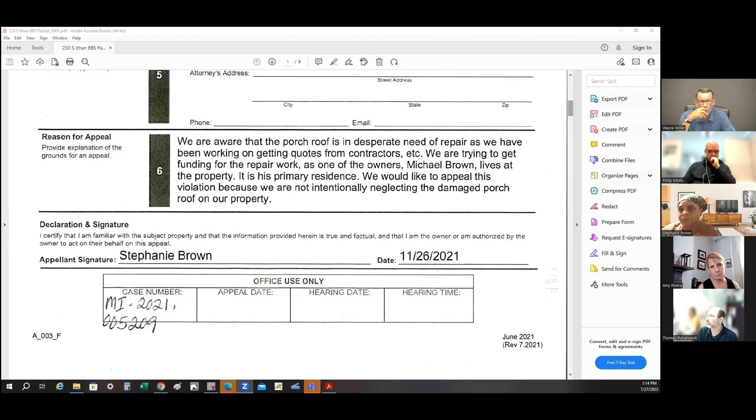But with that said, I'll share my screen. Okay. Can everybody see the screen? We can see the screen, but there's nothing on it. How about now? There we go. Yep.

Okay, so what we have is just the appeal with the notice, but I'll go right to the photographs. This is the common area between the two properties, and it just needs to be stabilized. You can see there's an accumulation of structural members that have suffered some wood rot between the two properties. So we would ask that the two responsible parties, both 228 and 230, come together and make the necessary repairs. As that happens, that's not jurisdiction for the board.

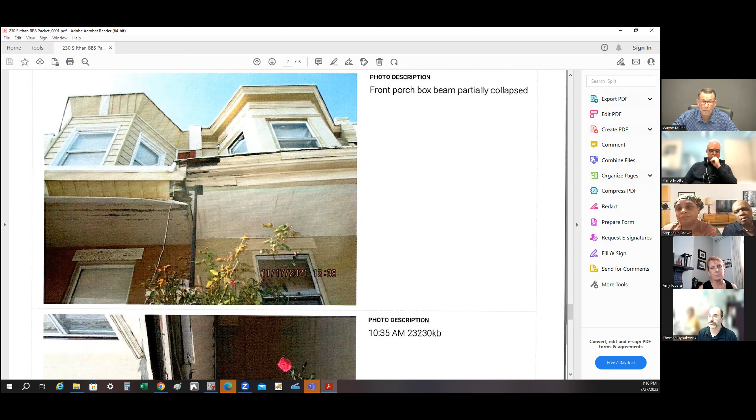The board's ruling is to basically listen to the case, whether or not it's warranted, and then make the ruling. So with that said, I'll stop sharing my screen and ask that we'd be okay with 60 days to obtain a permit. Okay, Stephanie and Michael, could you tell me your side of the story?

We did get a few quotes from contractors, in addition to reaching out to the Philadelphia Housing Development Corporation, and they were on board to do repairs on the house. However, once they sent someone out to do the roof, they did the roof, but then told us later that they didn't do porch roofs.

And this was back in, I believe, March of this year. So now we're back to square one of trying to get funding to get this porch roof fixed.

So Ms. Brown, have you spoken to the supervisor at PHDC? I haven't. The contractor who came out and started doing the roof contacted the supervisor because I told them specifically, we put in a form for porch roof. So he called to verify, and the supervisor said that they did not do porch roofs, even though that is what we applied for.

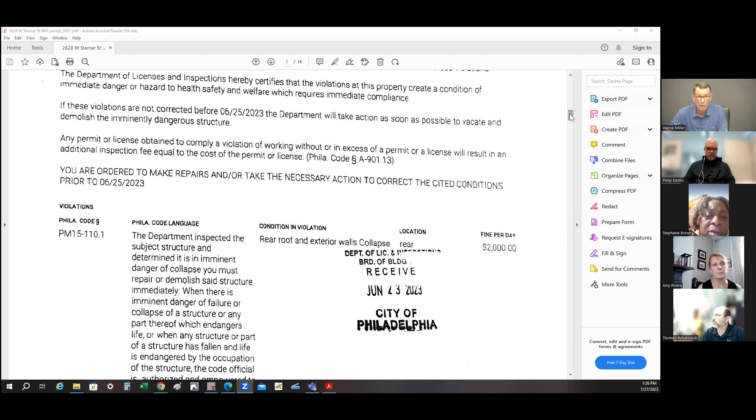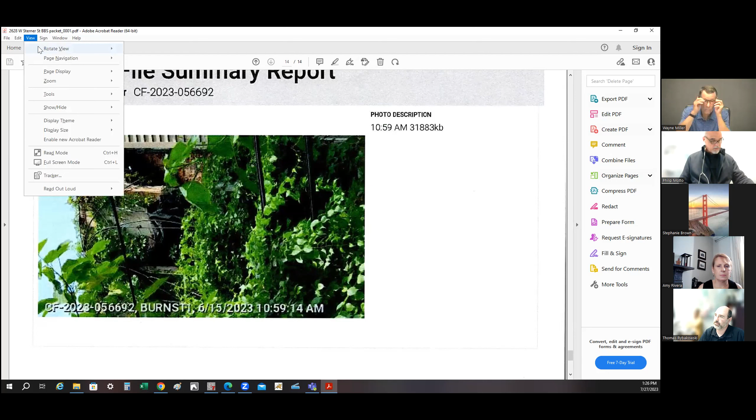This is a photograph of the property taken by the area inspector for the property at 2628 West Sterner. That's a photo of the posting, and this is a photo of the property. Let me also enlarge it.

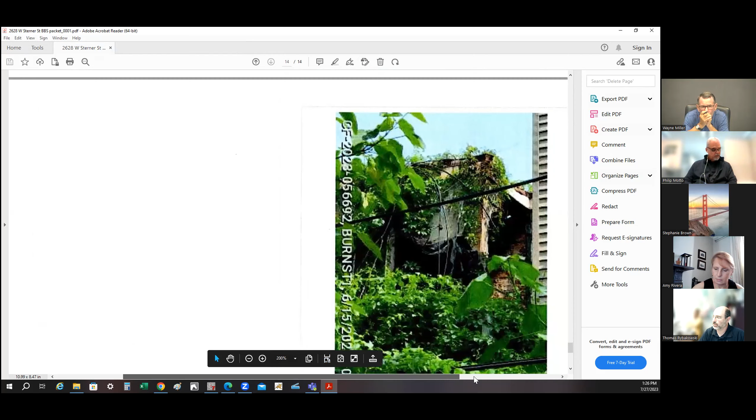This is a photograph of the rear of the property. You can see that the side wall and roof at the rear of the property is in a state of collapse. The property was deemed imminently dangerous. We would be looking for a permit to be under review within the next 30 days. With that, we'll rest.

Stephanie, you want to tell us your portion of the case? Yes. I want to start off by saying I've had a lot of contractors come out to take a look at things because I was unaware that it might have been to the extent that it was, but I didn't think that it was imminently dangerous.

That bathroom that you see is actually sitting on top of a concrete structure, the kitchen. There's a kitchen under it that's made of cinder block, and it's sitting right on top of it. I knew a tree had fallen and knocked the wall off. That's what you're seeing, but you couldn't see anything else because of all the foliage that was there, so you couldn't even see that it was sitting on top of a cinder block kitchen. Nothing had fallen other than that one wall.

As far as the roof, I was definitely not understanding about it because 5 or 6 years ago I had a roof put on there. But once I got the information from you guys about the citation, which I only got about 3 days before the work was supposed to be done, I had the contractor who did the roof come out, and he informed me that it looks like my neighbor next door, when he did his house, tore up everything and threw it on top of mine. I don't know how long ago that was done, but it started causing damage to the roof. I didn't know that, because last I knew the roof had been done.

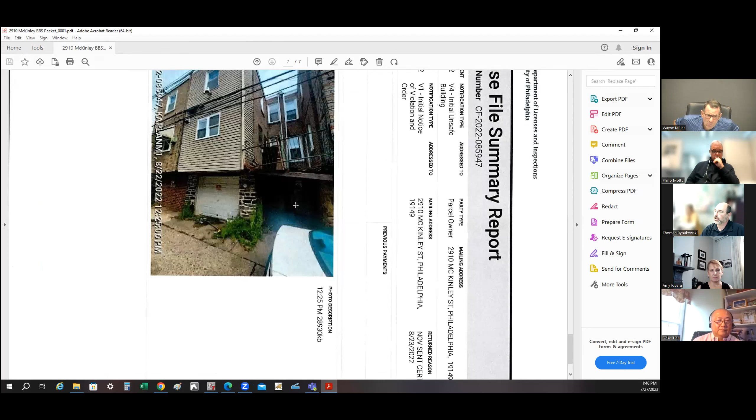So you can see between the two properties, the attached common deck between the two rear breezeways is dislodging, and the handrail is dislodged between the two properties.

What we are asking is that the owner of this property obtain a permit within the next 60 days for the repair. It will involve getting the other owner for that, but that's not jurisdiction for the board. The other owner did not file an appeal. So we are ascertaining to the board that they obtain a permit for the repair of the rear deck in its entirety for what they own within the next 60 days.

Okay, so, all right, Dave, can you want to tell your side of the story?

Yes, okay. Thank you for this hearing, and also thank you for the approval for this later appeal. I'm the owner of this property, but that's a rental property, so I don't live in this property. And the situation is that I initiated this case last summer, August, which multiple times we reached out to our neighbor to try to solve the situation, but never got any positive response from the neighbor. Actually, they never opened the door.

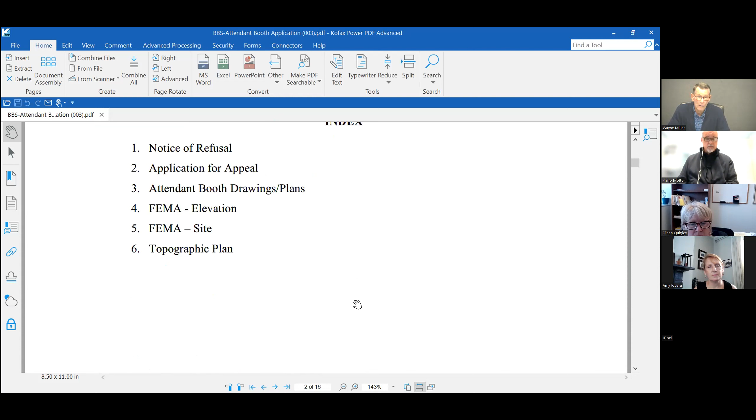Can everyone see that? Yes, we can. Okay, perfect. So good afternoon, members of the board. Thank you for your time today. We're here today to seek a variance from the regulation related to elevation of a proposed accessory attendant booth.

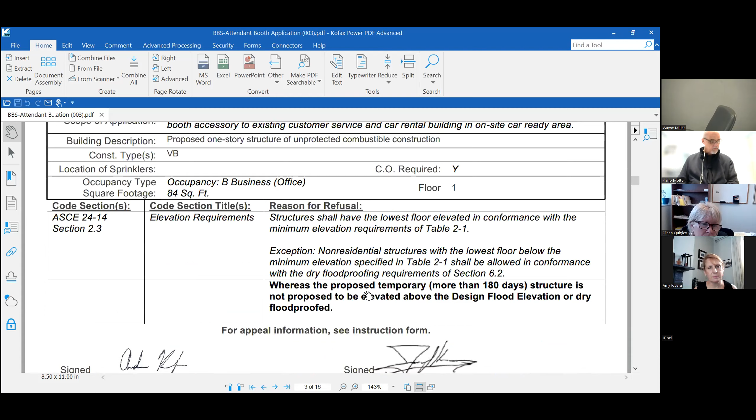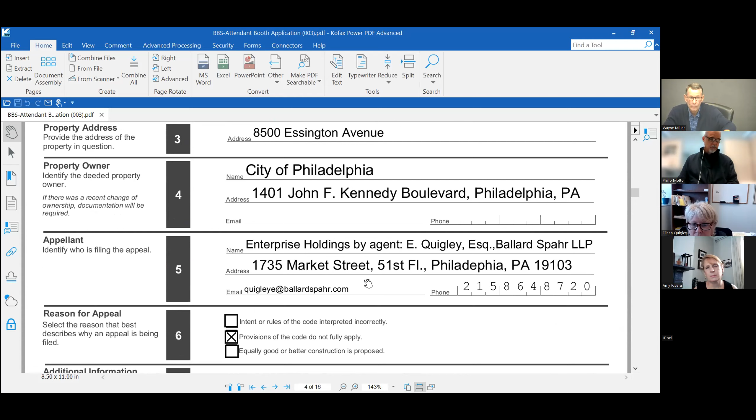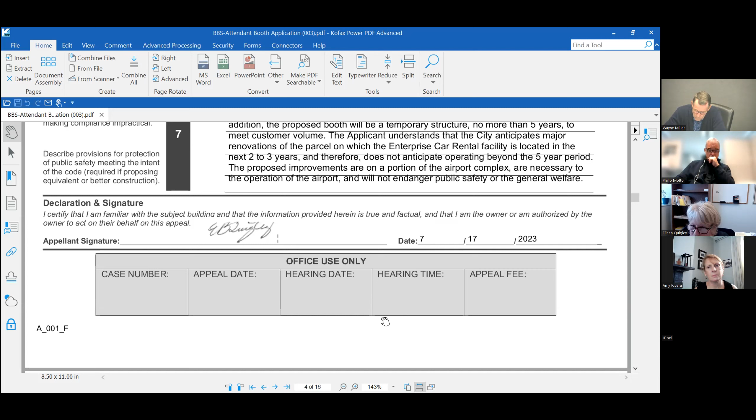It's accessory to an on-site customer service building for the car rental facility for Enterprise. The grounds for the appeal is essentially that the regulation doesn't really apply to our situation because we're technically seeking a temporary variance for not more than 5 years, because we understand that the city is contemplating rehabilitation and major improvements on this site.

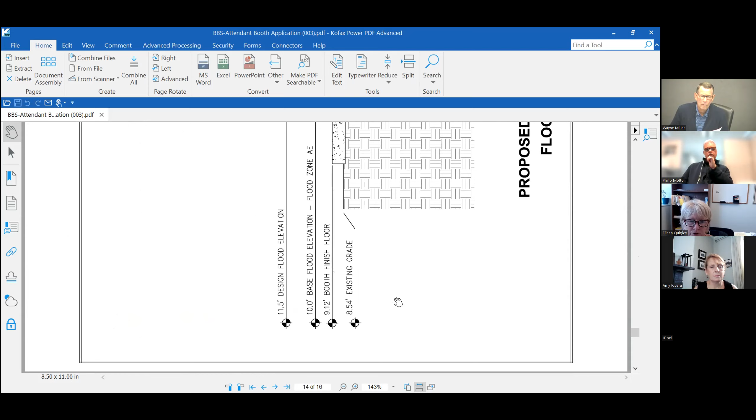So I'm going to go down to a topographic plan so you can see basically where the site is in relation to the Delaware River, to get you sort of oriented. So this is a visual where the booth will be, about 6,800 feet from the river. I'm going to try to reduce that a little bit. Yeah, and rotate right also.

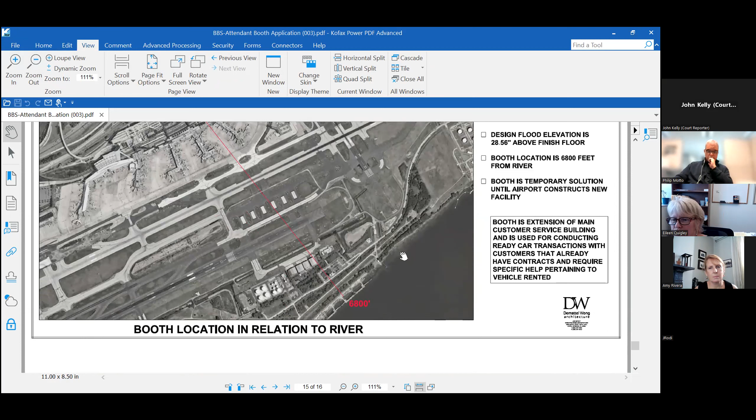Excuse me, this is the court reporter. Could I ask who just spoke? Oh, I'm sorry, this is Eileen Quigley. Oh, that was Joe Rodi, thank you, from DW Architects. He's the architect.

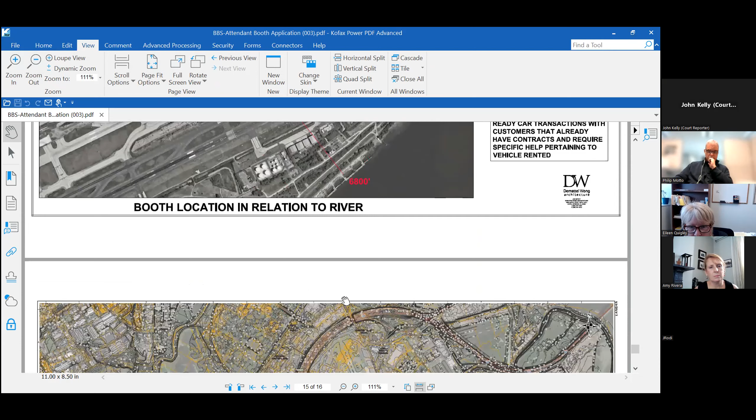So here's a visual. That gives you some idea. And this is the topographic plan. So this is the Delaware River here. This is the facility site here. So this is Joe Rodi. Essentially, this is a parcel within the overall rental car area complex serving the Philadelphia airport. It exists amongst all other rental car companies that are there.

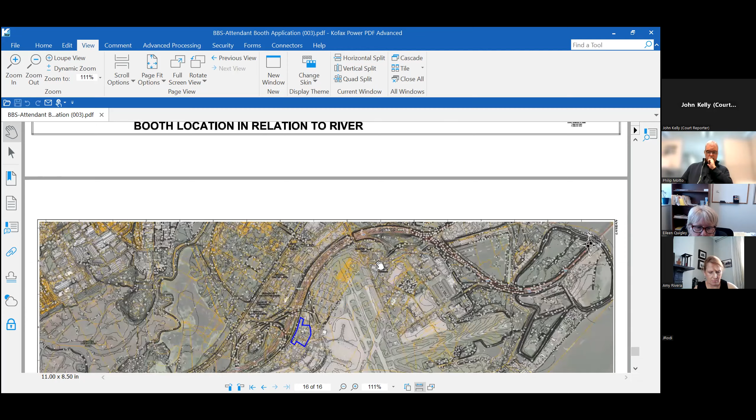And the proposal is to install this 84 square foot pre-manufactured booth for the purposes of housing two enterprise employees acting as customer service representatives. The function is being requested to try and improve the overall customer experience at the enterprise facility, where the operation brings customers to the front of the building, about 50 feet away from where the proposed small prefab booth is going to be placed.

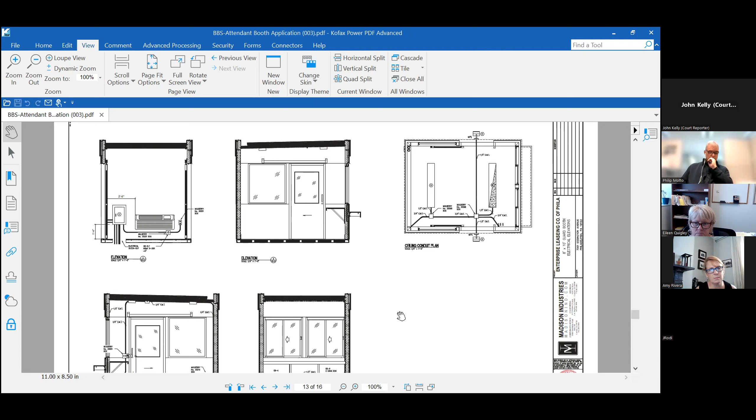Customers get dropped off and go inside to rent the vehicle within the main building. When they exit, they come out to their ready car. If there's an issue, which happens sometimes, or they want to change the car, the intent is for two employees to be housed in this booth who can immediately take care of whatever issues they have, rather than sending somebody back into the building to get in line and wait to speak to someone at the rental counter. So it's an accessory use to the customer service building.

We're requesting a variance for this in lieu of trying to flood proof this small prefab structure. Our current grade on the site is at 8.5, and the design flood elevation is at 11.5. The booth is proposed to be installed on a raised slab, and it will be installed to provide hydrostatic resistance per code. The proposal is to raise any electrical and mechanical above the design flood elevation in lieu of providing a dry flood proofing system to surround the booth.

Thanks, Joe. Anything else to add regarding the construction of that booth, the materials? It's an all metal construction booth, type 2B, non-combustible materials. It's currently not designed to be waterproofed, but we are taking the mechanical and electrical portion and raising it above to prevent any issues should there be some unlikely flood event on the property.

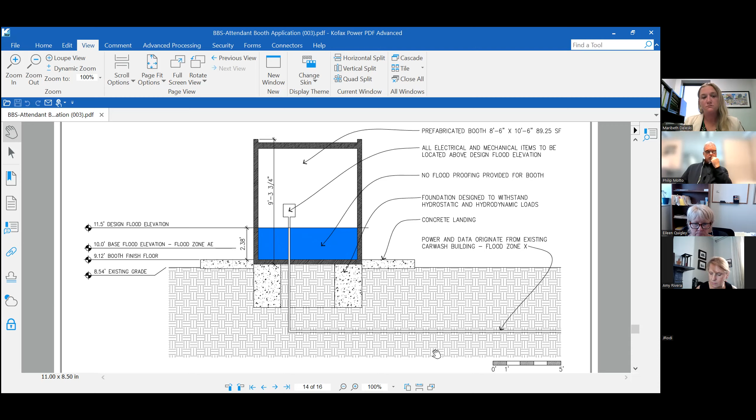Does anyone have a problem with this? No, I assume that in the event of a flood, this building would be vacated along with the surrounding area. That's correct. There's probably 400 vehicles that'll be parked in and around this site, and the risk would be much more towards the vehicles being damaged by flood than anything related to this booth. The booth is completely made out of metal. There are no other finishes in the booth that would be damaged in the event of a flood, so you're literally going to open the door, let it dry out, and start operating again. The only issue I would have, and you fixed it, is that you moved the electrical above the floodplain. Correct. I don't have a problem with it.

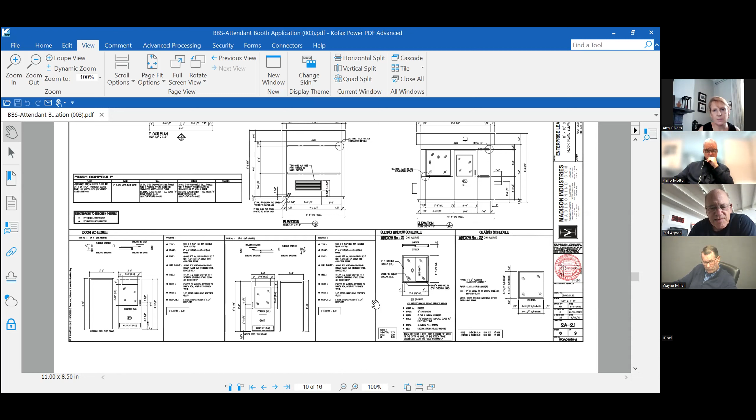We have one question. Which way does the door open in that little building? Does it swing inward or outward? Now it swings out. Could you make it open inward? Actually, they're sliding doors. Yeah, the plan shows sliding doors.

We just had a concern about the idea of a car sinking in water and not being able to open the door in a flood situation. We were concerned about somebody trying to open a door to get out. In this case, you can manually do it. If the screen is still up for everybody, the image in the upper left corner shows the floor plan of the booth, and you can see there are two doors, one on each side, left and right, and they're both sliding doors.

The whole thing's protected by bollards, Joe. Would bollards help? They've been provided. Okay. All right, I would think you could open a sliding door. All right, okay, just asking a question.

They said that it was temporary on the proviso. Are you going to give a time limitation? The request is for 5 years. No more than 5 years. Yeah, okay.

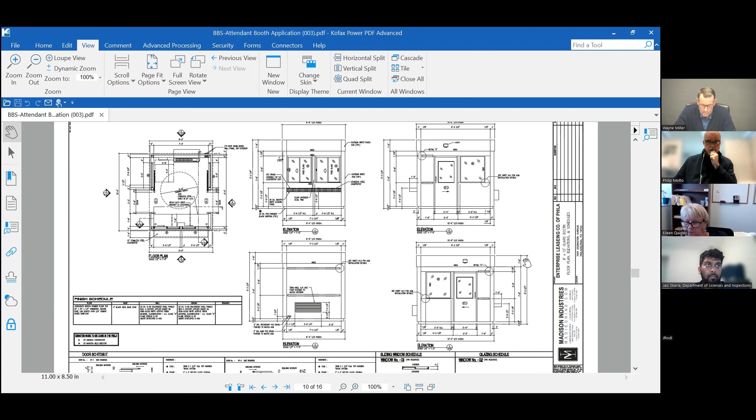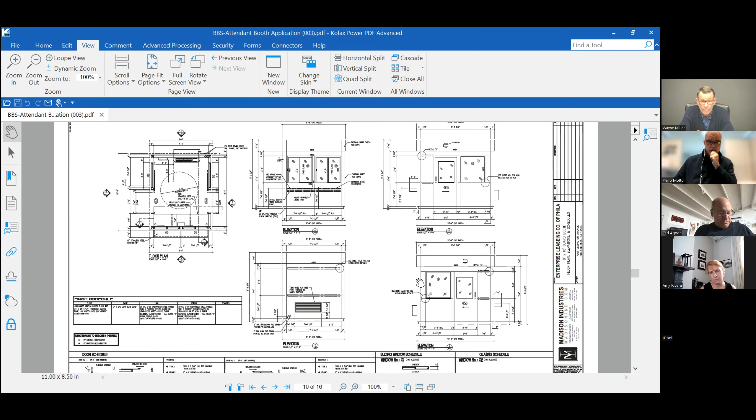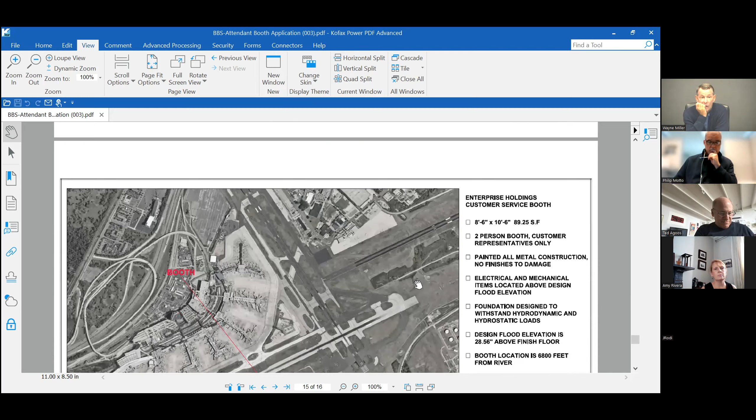They're looking at where the enterprise car facility will be located in the next 2 to 3 years or so. What they're going to do is the airport is planning to build a consolidated rental car facility on the footprint area of all the rental car companies where they sit today. That entire campus between Enterprise, Hertz, Avis, Budget, all those car rental companies are going to be relocated to one large parking garage facility on that footprint. They're in the pre-planning stages of that new facility right now, and it's unknown at this time when activities will start. But the first step is to build interim facilities for all the car rental companies to move into while they demolish the whole campus area to make way for the new facility. So that may start in 2 or 3 years, but that's why we're seeking 5, because it's unknown until we get back with the airport. Okay, all right, no more than 5.

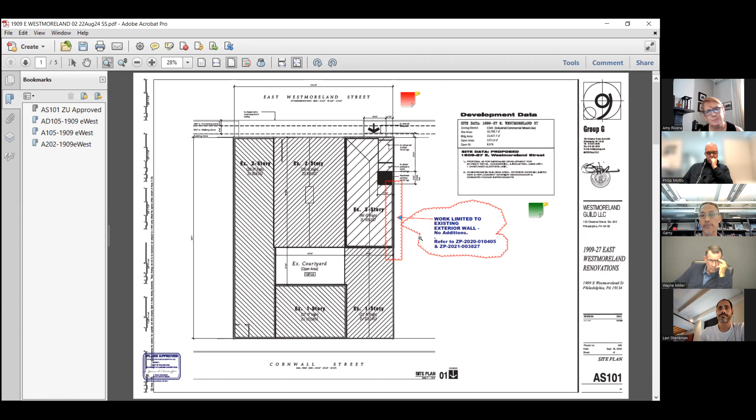Okay, so what we have is the property that Levi mentioned earlier, highlighted in red bubble is the area of the existing, in this case, masonry party wall. To the right of that property line is the adjacent lot that's being used as a parking lot. The area within the bubbled cloud is the location of the existing window openings that we are proposing to reopen so that we can allow natural light into several of the artisan studios on the upper floors. This is actually a composite site plan that shows the existing vacant lot relative to the adjacent structure.

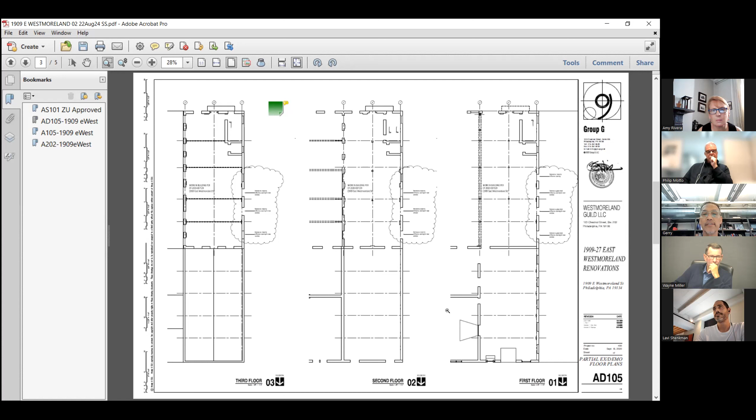Again, on the first floor, second floor, and third floor, several window openings were infilled. As you see here, we have 6 larger window openings that were infilled, then 3 smaller openings infilled with glass block, and an existing small window opening infilled with glass block, which we extended down to the ground so we can have an entrance directly off of the parking lot.

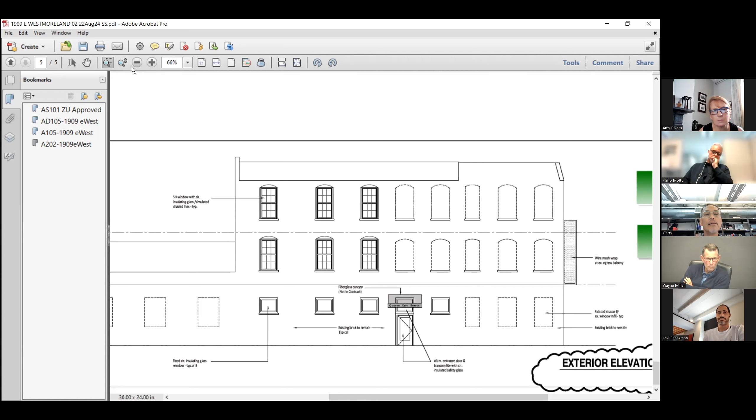And what's the ownership of the parking lot? The parking lot and the buildings in the original application are owned by the same entity. Okay, but are they separately deeded? That's correct. They're not consolidated. That's correct, yeah.

I don't know if there's a lawyer in the room, but typically would this require a formal easement, or is this a unity of use kind of situation? Our concern is that if anything were ever developed adjacent, the openings might have to be closed up. But I know our legal counsel is not here today.

Even if there was a unity of use, you'd still have to get a refusal from the board. A unity of use is only recognized in zoning, not building. So I think in the past they've used easements, and in the proviso you'd state the windows would need to be infilled if there were any construction over the parking lot. So we would call for an easement to be recorded, is what you're saying? I think that's what you did in the past, yes. Yeah, okay, that sounds right.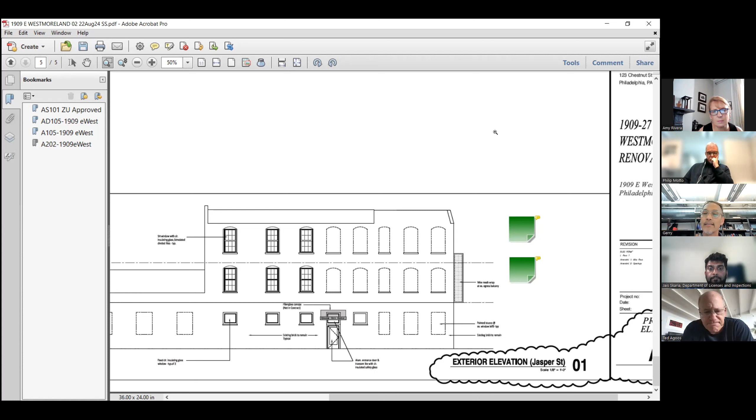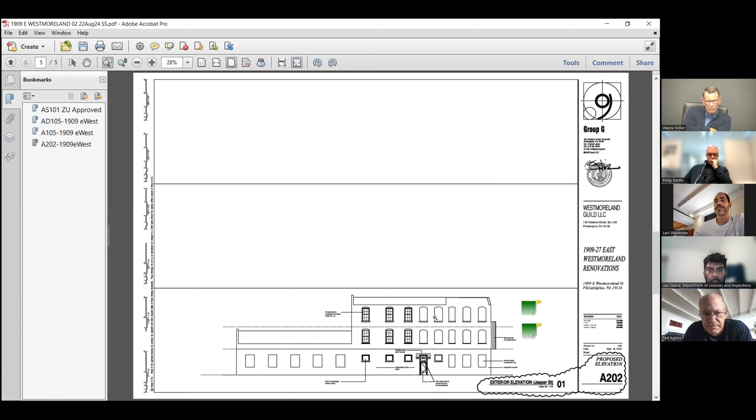The sprinkler system—you said there's 5 buildings there? Yes, that's correct. Okay, and where does the feed come in, what building? Well, if you go to, Gerry, share that first shot or the composite that shows both properties—the feed comes in through the existing 2-story along Westmoreland. The FDC connection is in sort of the top middle section there. It comes in off of Westmoreland Street to the left, right there where Gerry just drew a line.

Okay, and is that building accessible to all the buildings, in case there's a fire, do they have to shut the system off, or if they sell the building, do they have to disassociate that building from the sprinkler system? So all the buildings are, I don't want to use the word consolidated, but they share a common area. The buildings are, you can pass through all the buildings. So they share a sprinkler system and common area, fire alarm panel, monitoring, everything. And everything in the buildings has been completely redone, everything is new. Wayne, they do show up as one entity on Atlas.

Okay, all right, fine, yeah. Are you able to provide a sprinkler head at each of those new openings that you're proposing? Yes.

Okay, great. Well, before we go there, Ted, you introduced the idea of a deeded easement moving us towards the unity of use, which is, as Jace mentioned, only applicable under zoning. That actually introduces our rationale for appealing the refusal. We're basically saying we'd like the board to consider our appeal in the spirit of what unity of use is promoting, which is that there's a benefit for both properties to be integrated in their use and in the way they relate to each other, providing access and natural light so it can be a successful development. That addresses the benefit under unity of use, which I understand is only applicable under zoning.

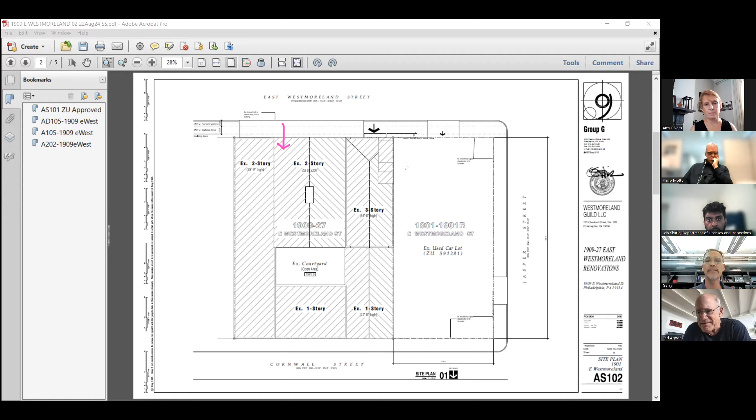Yeah, but you also have to look at exterior wall openings—you have 0 feet fire separation distance, so you're not to have any openings at all there. I'd actually like to address that question, Jace, what you mentioned. Under the same exception—in fact, I'm going to share another sketch—under the same exception, it allows this condition where a property line can run through a building and not require a party wall or a firewall where the property line is. It seems to me that this creates a more hazardous situation, more so than what has been submitted under the application.

Correct me if I'm wrong, Jace. I'm saying that the exception language allows for a property line to come through an existing building, where the building basically overlaps the property line. I'm not talking about our specific application, just that the exception allows this condition. Can you reference it in the code?

Sure, it's 706.1.1, exception 2. I'll read it. But Gerry, are you referring to a situation where there's a property line inside of a building, but where it's the same ownership on both sides?

You said Monday? Yeah, it was through Newforma. Any luck? Can we try to share? There we go, it's coming up. Okay great, okay great. There you go. Thank you very much, thanks for your patience.

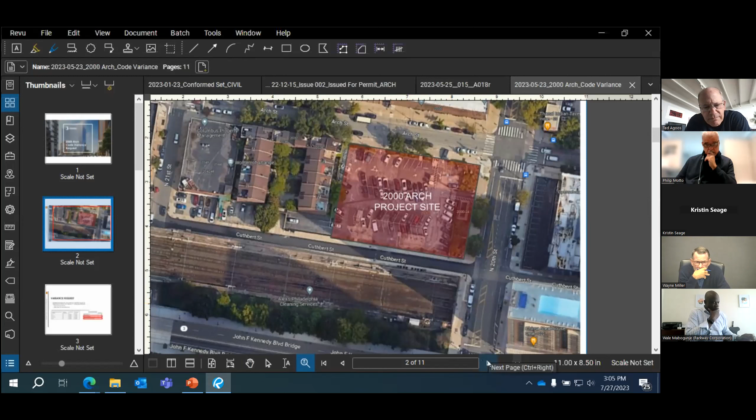Okay, great. All right, so as you said, we're looking for a variance for the 2000 Arch project. The project is located at the corners of Arch, 20th, and Cuthbert Street, adjacent to the SEPTA tracks right-of-way. We are requesting an exemption from the IBC 2018 Table 602 for the fire resistance rating requirements for exterior walls based on fire separation distance.

So to give you some context of what we currently have in terms of our siting, we have a frontage on the south facade onto Cuthbert Street. We are measuring 15 feet to the center line of Cuthbert Street as defined by the fire separation distance definitions. And on our west facade, which faces a new alley, above our 9th floor, we have an 18-foot fire separation distance.

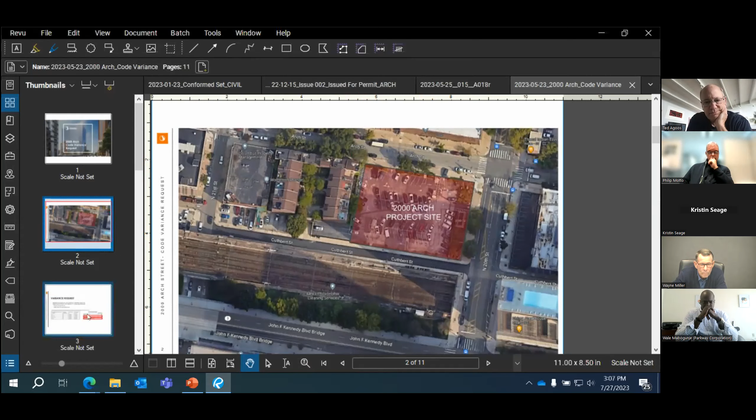So I'll go back here to the site plan and give you a little bit of a view. Cuthbert Street is a 30-foot wide right-of-way. We're measuring right now, if we do it just purely by the way the code states, it would be 15 feet. And to the west, which faces some low profile residential buildings, at our 9th floor and above, we have 18 feet to the property line. So we are looking to eliminate the requirement to have 1 hour rated exterior walls.

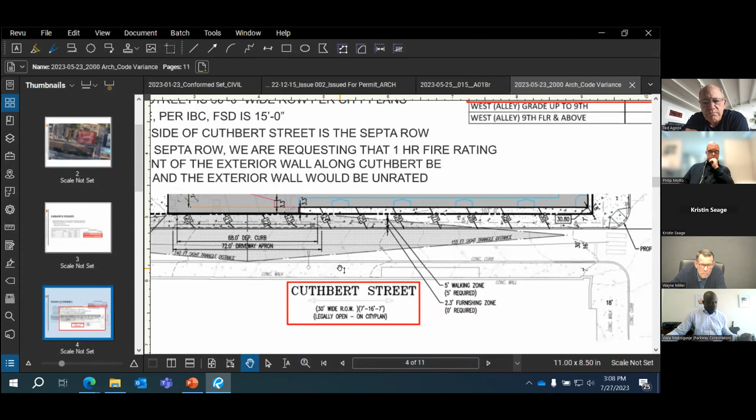As required by code right now, we do have a 1 hour rated shadow box at our floor lines to comply, but we're looking for relief from that. Going deeper on Cuthbert Street, because the street itself is 30 feet wide and it fronts onto those SEPTA train tracks, our proposal would be that we're able to measure our fire separation distance that full 30 feet, and we're a couple inches off the property line. So we would be over 30 feet, which the code states that anything over 30 feet can be unrated.

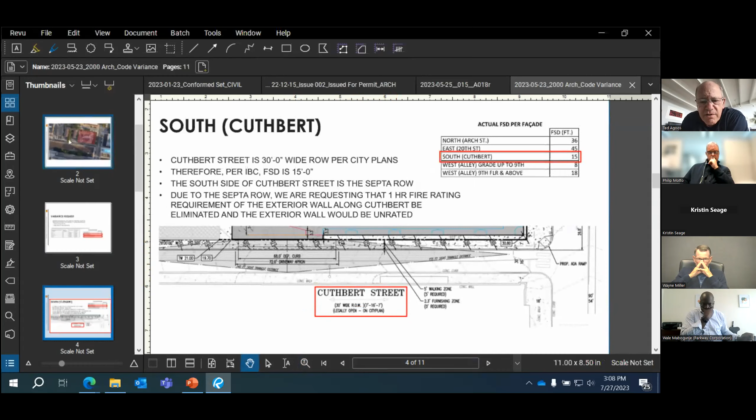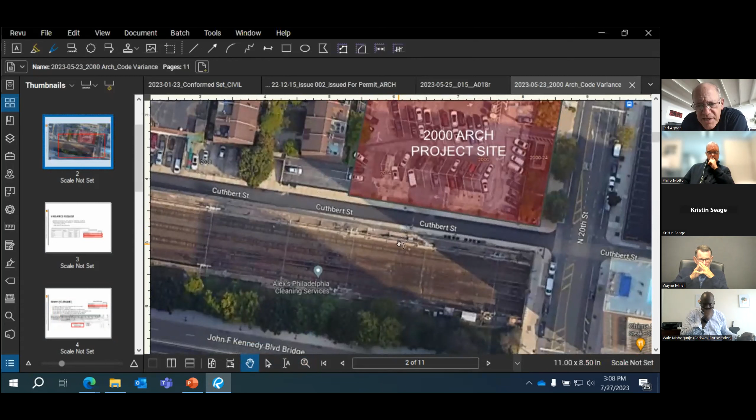That's the one request related to the south facade, Cuthbert Street. How far back are the tracks from that property line on the south side of Cuthbert? I don't know that off the top of my head, but we can chase that number down. Is the property line the sidewalk line there? That's the 30 feet from there, that's the right of way.

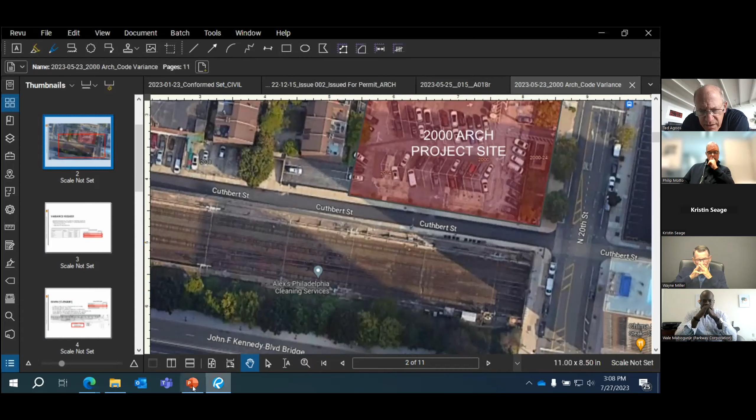Yes, there's a retaining wall and this drops down, there's a change in elevation. I have this pulled out too, just to give you some 3D view here. There's a large retaining wall that's set back from the sidewalk, and that's where the tracks begin.

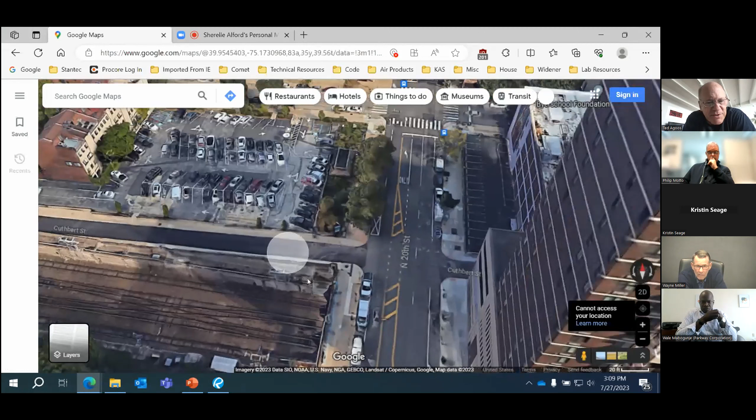Any guess as to how far back? Looks like there's one track right against that wall. Let me see if it says anything in our civil drawings. I think our drawings kind of end there because we're not on the tracks itself. I apologize, we don't have that handy, but we can follow up with it.

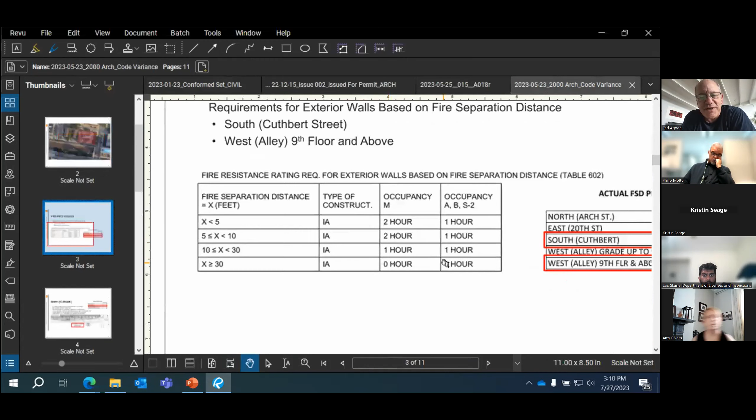I don't know if you know, or Jas, you may, what would the distance be required if the exterior wall were not required to be rated? It'll be over 30 feet. Right, so that would be the equivalent of being 60 feet away, I guess. But the way that the fire separation distance is called out is to be measured to the middle of the street.

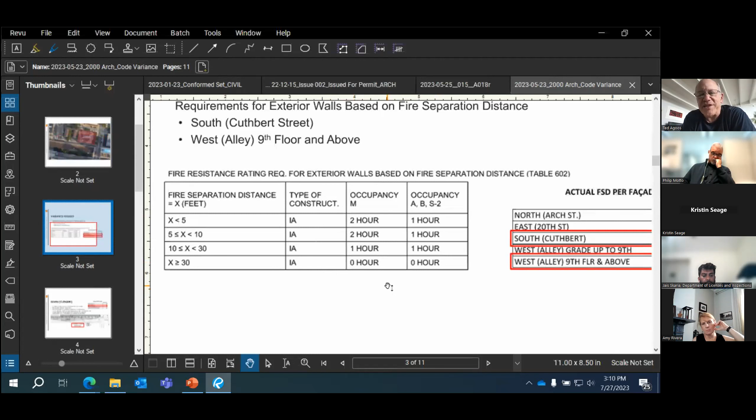I'm just wondering how wide a street you'd need in order to be compliant without that 60 foot. Well, we are compliant on the Arch Street side, that street is much wider. Just to the center of that street, we're at 36 feet, over 30. And east on 20th, it's even wider than that. So those two facades are unrated.

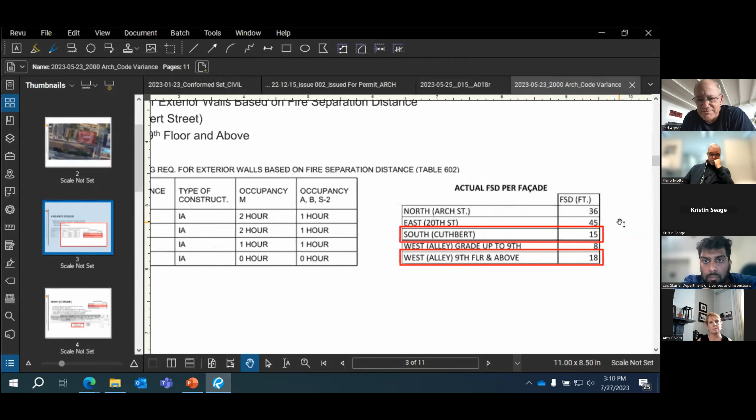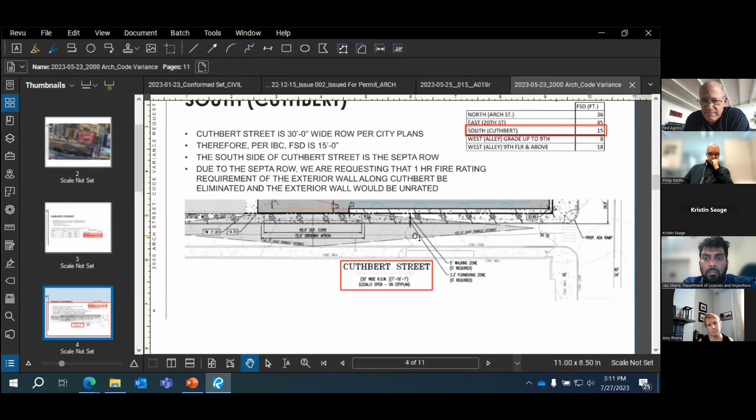I think there's access here, I'm not sure if someone from the fire reviewer might be on the line. There is access along Cuthbert, someone could still come down the street and access that facade. So we were really thinking that because that track area is open, we could hopefully measure that to the full 30 feet of that Cuthbert Street right of way.

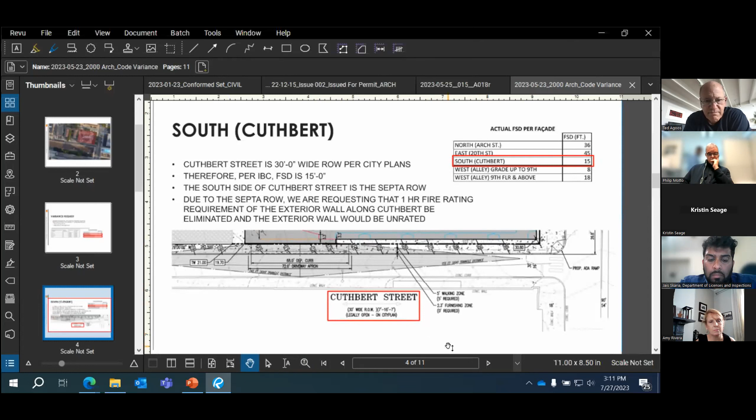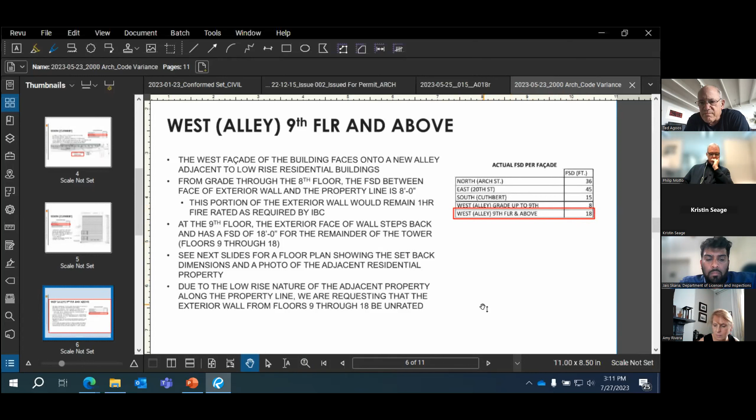Food for thought. So then the other request here would be a similar request on the west facade. On our west facade, we have the building step back above at our 9th floor and above. Below that, we are not requesting any change there, so we would be rating those exterior walls and complying with all the percent opening requirements. But where we step back even further at the 9th floor and above, we're looking for the same type of exception or exemption there. For context, this is our floor plan, the west facade here on Plan West.

Let me zoom in just slightly. To our property line, we have 8 feet at that lower portion of the building. And so our request is really for the upper portion of the building, which is 18 feet to the property line.

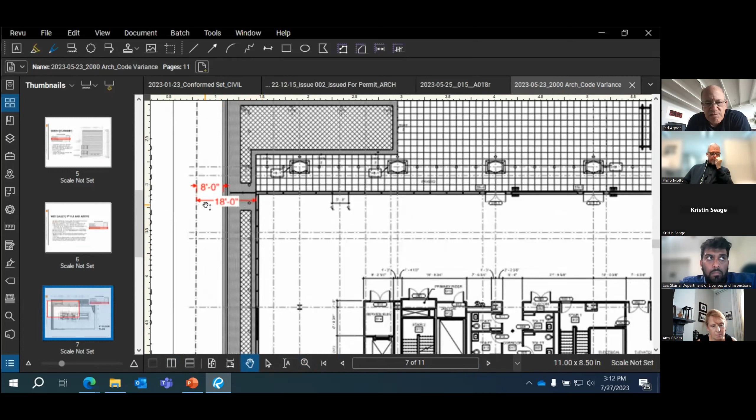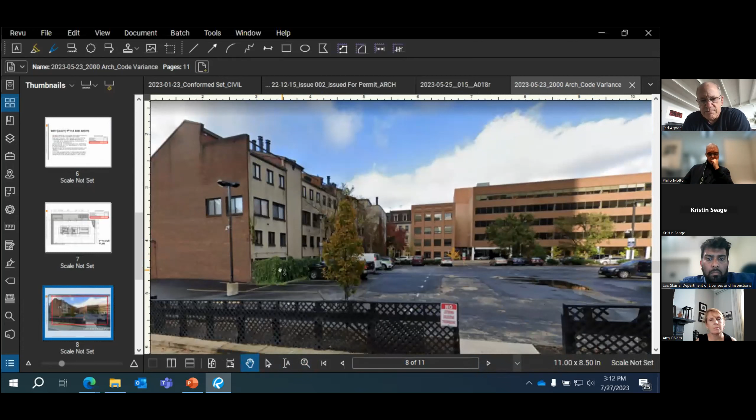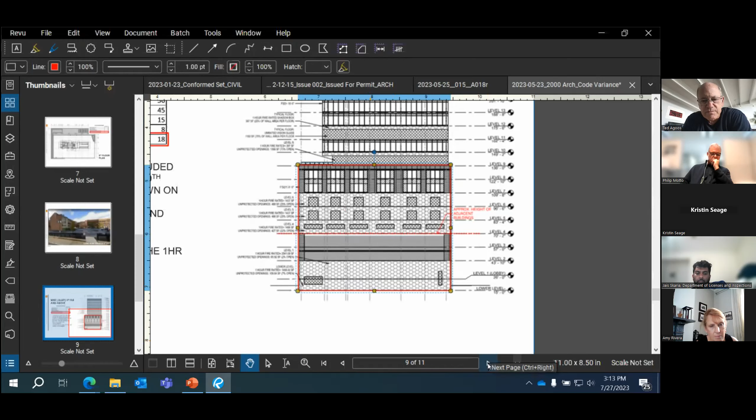The adjacent property is a low-rise residential property with a courtyard in the back. Our building, or those buildings, come up only to about the 4th floor of our building, so all of this area would still be 1 hour rated. I'm just highlighting this area. You can see that red line showing the approximate height of where those adjacent residential buildings come up to. Our request would just be to reduce that rating requirement once we get up to the 9th floor, and up to the 18th floor would be where we are asking for that exemption.

And I know Lieutenant Dimes can weigh in on this. We've at times looked to be maintaining that rating at least, say, 15 feet above the top of an adjacent building. So you're clearly well above that. Correct, yes, we are well above that.

You said 15 feet, Ted? Yeah, I know at times in the past, like 2 floors above, or a floor, and in terms of windows above, in terms of risk from, let's say there were a fire in the townhouses, affecting the new construction. And what is the distance?

We are well over 70 feet above to where we would be requesting the exemption. Yes, I think, just my opinion, 15 feet's too small, 70 feet would probably work. I think that if there was a fire in that townhouse and it was a good one and it was ripping pretty good, it could jump to the other building with 15 feet above, depending on wind direction and stuff like that. But that's not what they're asking here. It's a 70-foot threshold, which I would think would be.

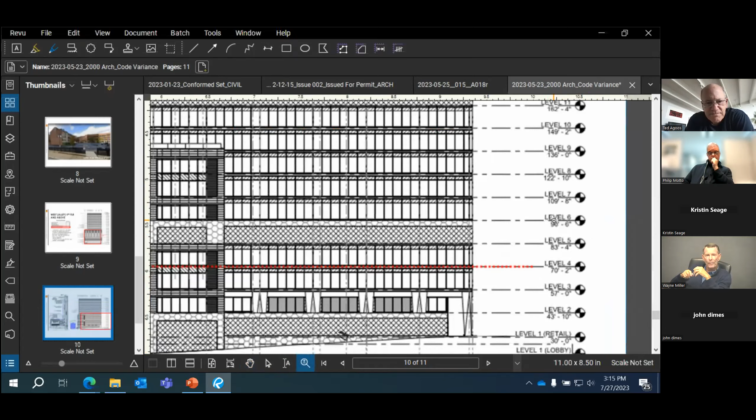Let me just double check my math here. So we got 136 to 66 feet, I apologize, I misspoke. Yeah, there's really, again, there's no data on that. Obviously the greater the distance, the better. But anything 50 feet or greater would probably be, in my opinion, a lot safer than the pre-designated 15 feet. So I wouldn't have a problem with that on that side.

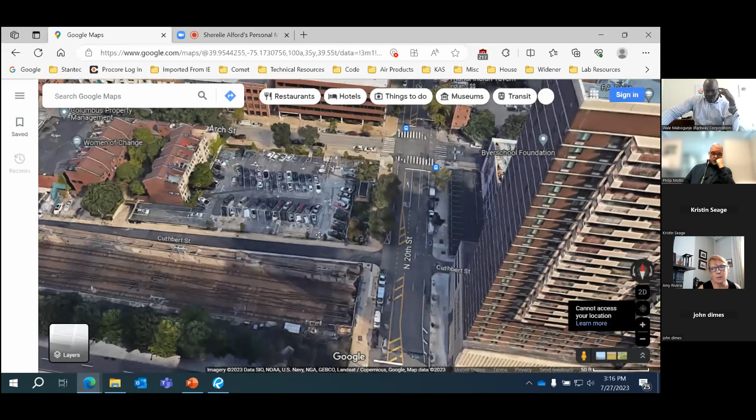It would be, we have to get that number for you, but it's over 30 feet. Right, plus the code tracks are required to also be over the 30 feet. Tracks are also lower in this area as well. This is just where the tunnel exits from suburban, yes, so they're several feet below as well.

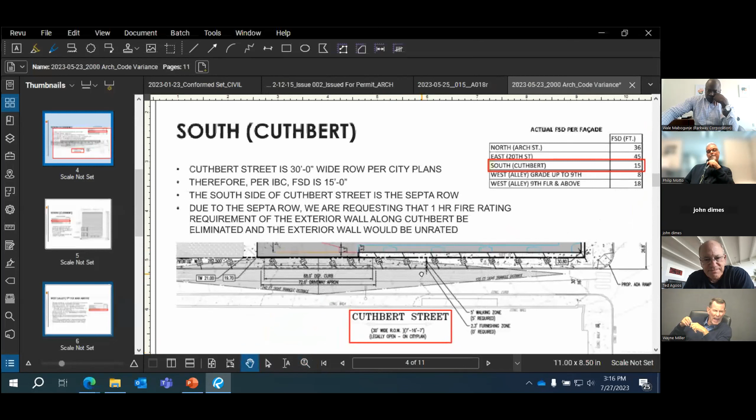Is the reason for the variance request cost saving? Partially. Okay, and what's the rating, is it 1 hour? That's what you would be under the code. Correct. And what is it now? If you got the variance, what would it be? If we got the variance, it would be 0, unrated.

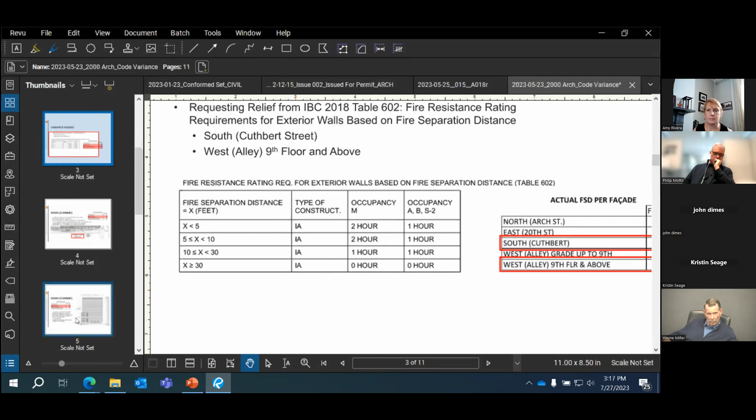Oh okay, so the code says anything over 30 feet of the fire separation distance is 0. So that's what we're looking for, is to basically be able to calculate that as over 30 feet because of the SEPTA right of way tracks being open and having that Cuthbert Street be 30 feet wide. And is most of that facade glass? Yes, there's small portions that have terracotta, but predominantly it's a glass facade.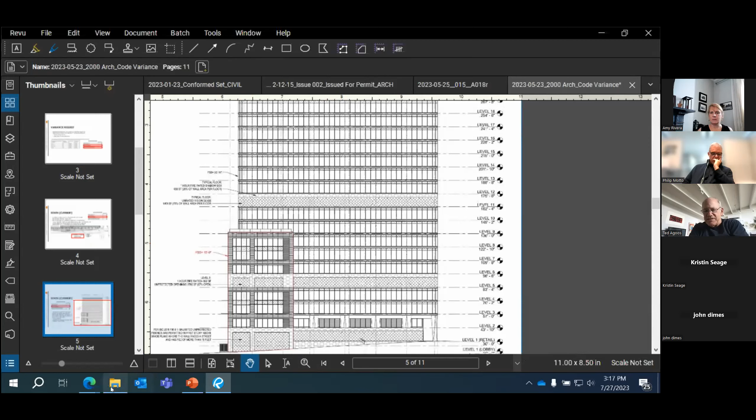Yeah, I mean, it seems like it's about 50 feet from the face, from your property line to the tracks. But I don't know, in the picture there was a track right next to that wall. Yeah, but the wall is set back. Yeah, but from the building, it's not, it would be back here on the other side of that street. So at the edge of where this parking lot is shown, we're just slightly off of that line. Right, but are we saying it's about 30 feet from that property line that you're delineating with that retaining wall?

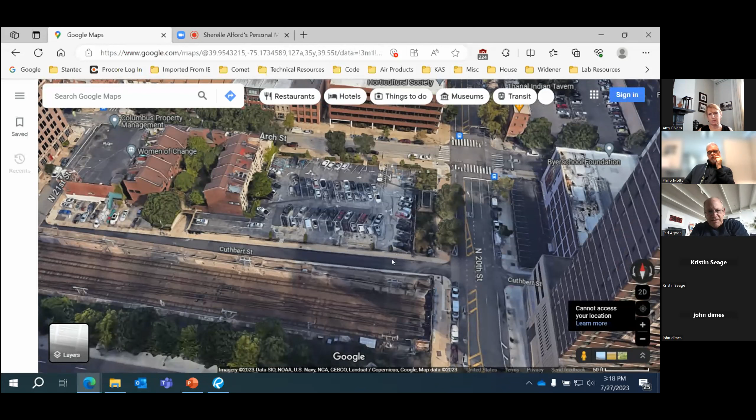It's at least 30 feet. And then I see another track very close. So this track is, are 10, 15 feet down from that wall.

You want a caucus? Yeah. Okay, Phil, can you get us in the breakout room? You should just have to re-enter, Wayne. You had the invitation. Okay pal, gotcha. I'm becoming an expert at this stuff.

Recordings on? Yes, sir. Okay, here's what we came up with. What you proposed on the structure on the west side up to the 9th floor and above, that's fine. On Cuthbert Street, we'd like to see the ratings up to the 5th floor. Because what we think is that, I know the tracks are down, but the trains are up. We figure it could be probably level with the building, so up to the 5th floor we need a rating. That's where we're at, so that's what we would do to give the variance, so what do you think?

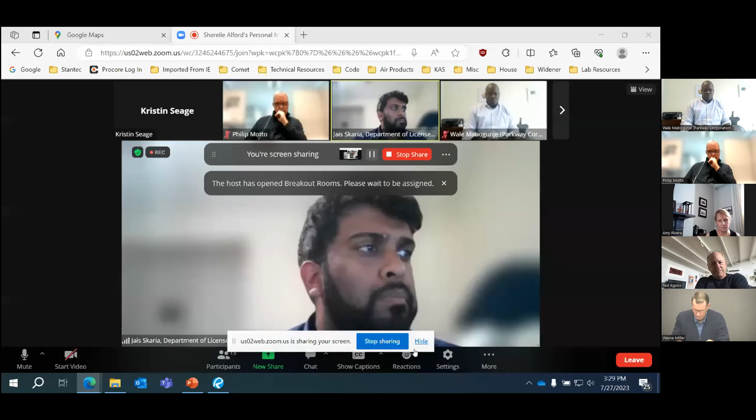Per IBC 2018, let me share my screen real quick so you can follow along with me. This is Type 1A construction, right?

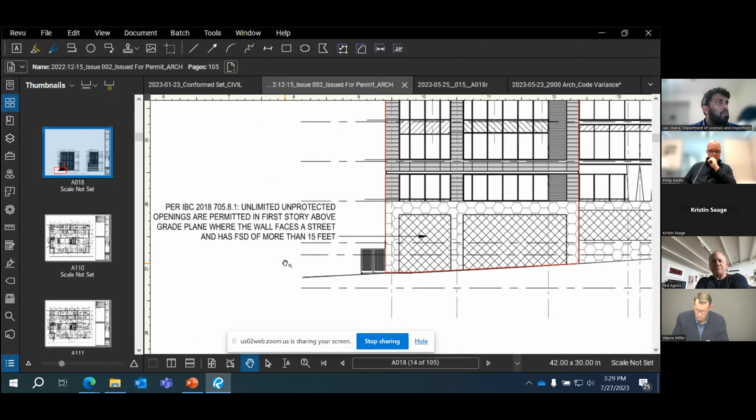Correct. So I guess I misspoke, but we're allowed unlimited openings. That doesn't have to do with the rating though. Well, it's unlimited unprotected openings, so in theory it could be all glass, right? Which it is.

Unprotected openings are permitted in the first story where the wall faces a street that has an FSD of more than 15 feet. So the cross hatching is actually glazed - that's diagrammatic there. The non-crosshatch is a shadow box, so it still has a solid wall behind the glass, but it's not rated. Gotcha, because it's unprotected basically.

I just want to make sure we're doing everything you want to see for us to be able to do this up to level 5. I'd also want to see where level 5 is on yours - let's make sure we're thinking the same thing, that we're kind of 4 stories above grade is where the rating would end.

Yeah, we would be upwards of, if we're up to level 5 or through level 5. So if we had to do through level 5, we'd be up at 90 feet, let's say 96 feet.

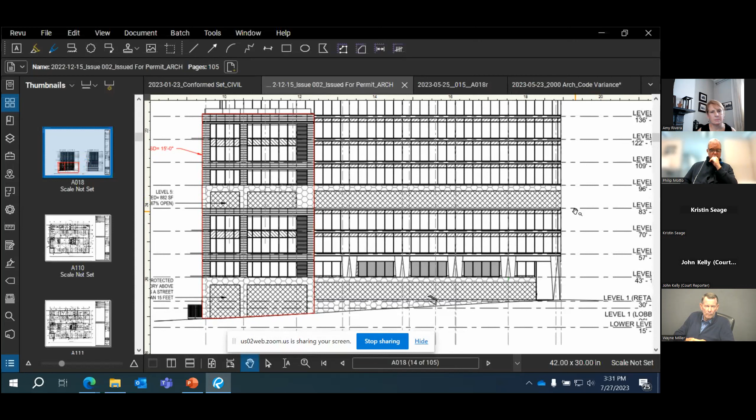You used exception 1 for that? I didn't quote the exception number, but it's 705.8.1. It says, I'm guessing you're using exception 1 - in groups other than Group H occupancies, unlimited unprotected openings are permitted in the first story above grade plane where the wall faces one of the following: a street that has a fire separation distance of more than 15 feet, which you do. Yes - an unoccupied space.

Yours is an occupied space, right? It is occupied space, yes. So maybe we missed that portion - I'll have to go back and read it again myself. So we'll take another look at that.

Did you say it meets one of the following? Yeah, it says one of the following. I'm just trying to make sure it says one of the following - I'll reference it. I think so, this says it does meet one of the following. But this has unprotected openings, but you have walls there. Well, it's all glass, so it's basically all an opening. Okay, based on that exception, then you do comply with that first story - it's not an H occupancy, so. Correct, it is not - it is B.

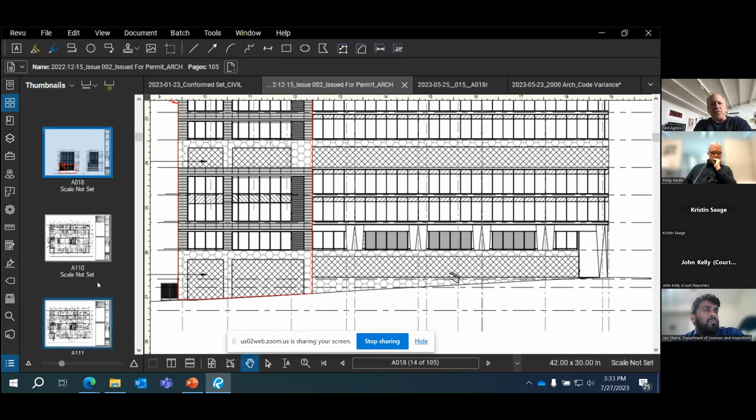Kristin, if you can just clarify so we write it up correctly - on the west side, is it including the 9th floor, or up to the 9th floor? Sure, we would be starting our unrated walls at the 9th floor. Okay, yeah, we were okay with that.

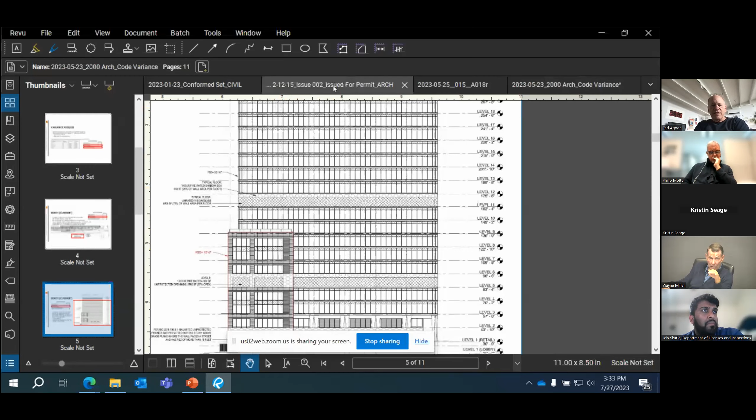Thanks. Now, the first floor doesn't have to be rated on Cuthbert Street? Did we base that on - I don't know if that was our final. Based on that exception, that's what it says, yep. But you said that if it was occupied, right? No, it says it has to have one of the following - it faces one of the following. Okay, just one of the - okay, the street that has a fire separation distance of more than 15 feet.

Right, so that only applies to Cuthbert, not the alley side. Correct - on the alley side, we are rated from ground to level 9.

I'm sorry, this is the reporter - I didn't hear ground to level what? 9. Thank you.

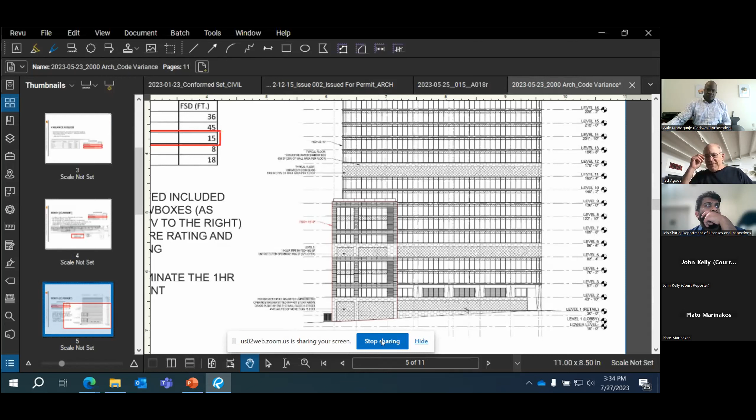Okey dokey. So, we got one left, right? Yes, that's correct. Fairmount Avenue.

Hi, it's Plato, how are you? Janina in my office can present the drawings. Hold on a second, we gotta get introductions and all that stuff. Oh, I apologize. No problem, Plato.

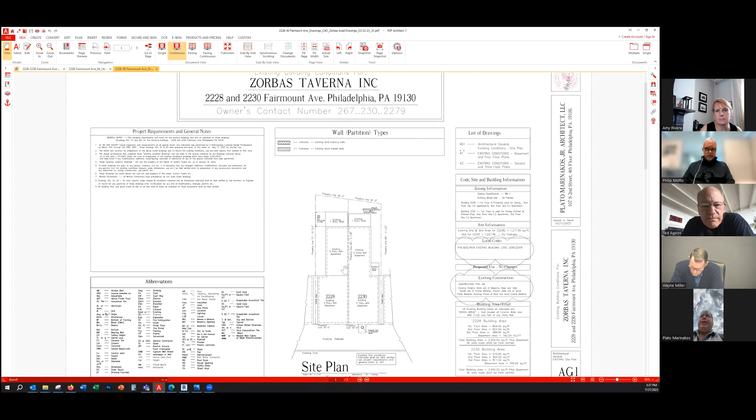Okay, whoever's gonna present the case, go ahead. Thank you. Janina, you want to share the screen? So I'll give you a little bit of history. This restaurant is Zorba's restaurant. It's on two parcels, 2228 Fairmount and 2230 Fairmount. It's a mixed use building. The first floor and basement are the restaurant use, dining area and kitchen, and the upstairs has residential units. It's a 3-story building with egress out the back through an alley.

And the reason we're here today is because the building doesn't have sprinklers. But I was able to convince the owner, Nick, from Zorba's to install a sprinkler system. So we just wanted to let you guys know that that's what's being done. He's already applied for the sprinkler permit.

I'm sorry, this is the reporter, Mr. Marinakos, you're fading in and out. No, I apologize. He elected to put the sprinklers in. So that's the good news. That's why we're here.

Will this application be withdrawn then? Well, I don't know the procedure, I apologize. We just wanted to say that we're putting the sprinklers in so we can comply with the code, because there was other things that L&I mentioned about 1 hour doors with hallways and all that stuff that I don't know if that was constructed that way. So that's why we wanted to do this hearing, so I could say look, we're putting the sprinkler in, the building is safe to go forward as a multifamily building.

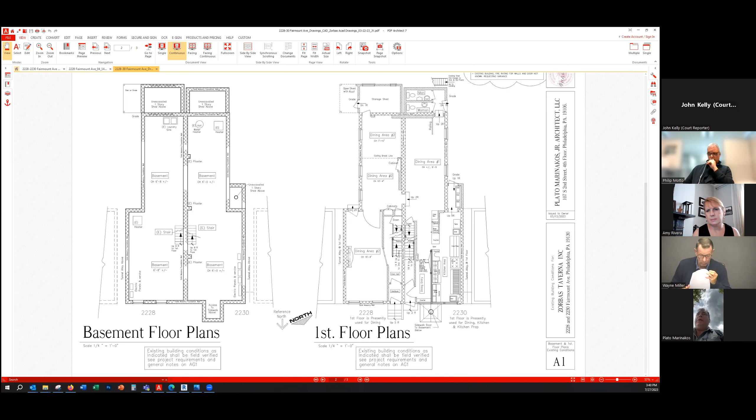Okay, what does he need to do? I guess we would just state that it needs to be sprinklered, on the proviso. So we're denying the variance and we say it needs to be sprinklered. Right, that's all, under sprinkler, that's good.

Yeah, I mean, he's doing the right thing. I convinced him and I told him it's good for the public safety, good for your clients, good for everybody involved. So he agreed. Okay, good, that's work. All right, keep walking, Okay Plato, talk to you later.

Good luck, thank you. Bye-bye, guys. All thanks. Right, bye-bye, bye. All right, okay.